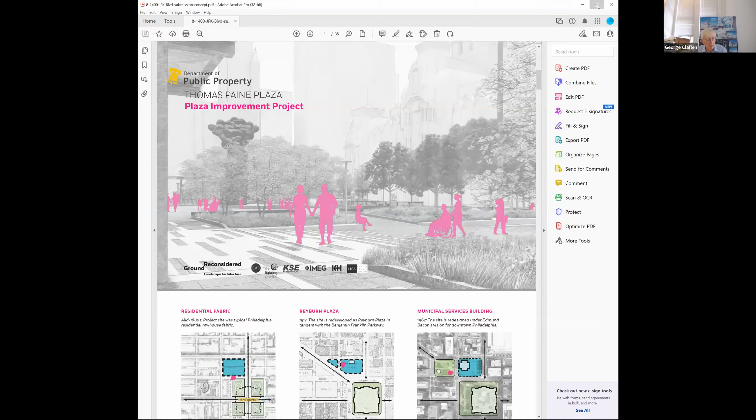I had Inga's article on bus apocalypse and can't bring it up quickly now, I may be able to later. The second item is that without the public knowing much about it, the Greyhound bus terminal is now being handled as a street bus terminal, along with two other bus companies, between 6th and 7th on Market Street, and it's a total disaster. The long haul buses interfere with the city buses, and it's an indication that merits some action by DAG, in the sense that the streets department, without proper guidance from above and without proper planning, has allowed this to happen.

There was an excellent scheme, which the article has a picture of, I think in Inga's article, of a bus station plan for the North Plaza at 30th Street, just north of the station, where there's now a surface parking lot. This is an example of inattention to planning by the city, I think, and we'd certainly be looking for people to help us write a piece on that.

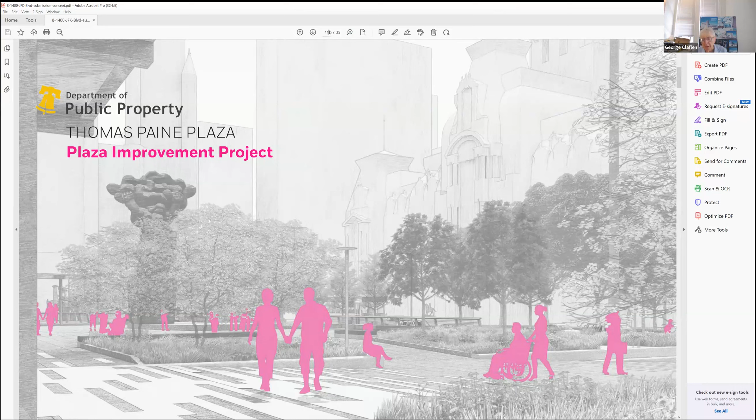But because time is so limited, I'm going to go right into the Paine Plaza. That's the third item. The drawings for Paine Plaza have just been announced because they're now going to the Art Commission. I'm going to go very quickly through them since this isn't the time for an extensive review, but you should be aware of it. There's the plan. That's the MSB building, the white cruciform to the left of that drawing, and JFK Boulevard is at the bottom, Arch Street at the top, and Broad Street at the right.

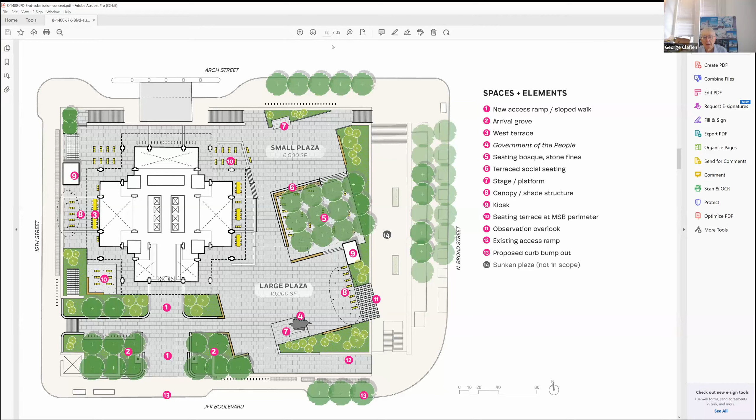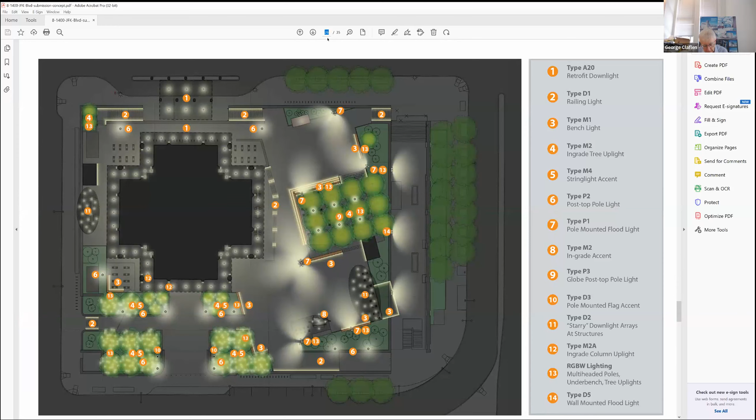As you can see, it introduces a diagonal. The 14 there is a sunken plaza that you're all familiar with, probably along Broad Street. I'm going to go very quickly here, and then there'll be time for maybe just a couple of comments. There's the view of the Lipchitz sculpture and City Hall in the background. There's a very nice night drawing here, and I'm going to put that up. There's a rendition of the lighting concept, and then I'll go to one last drawing and maybe call on David to start some comments.

So let me just say, I think this is the work of Ground Reconsidered. This is their proposal. Among the features that are really very attractive is the astonishing increase in shade coverage. To make that possible, they raise the plaza height about a foot or a little more than a foot through much of it in order to create planting depth.

The bunch of trees on the right side that you see here, the ground is covered with gravel. It's intended as a shady sitting area, a bosque they call it. There are several places where they propose to build shade roofs to shelter areas. There is an enormous quantity of increased seating, places, tables, and chairs for outdoor seating. If you know the situation at the so-called porch at 30th Street Station, same architect, same idea, lots of portable seating. I think in our current emptying out of office spaces, there's a question of how many chairs you need, but otherwise, I think it's a very handsome thing.

The introduction of the diagonal, they say, is justified by the fact that the new group of trees on the diagonal faces City Hall Tower. It's obviously an interesting geometric addition. Frankly, I think the idea that the group of trees wants to watch City Hall Tower is at least smile-worthy, but it is a strong design feature. It does increase variation much more up and down, so it'll be more like a landscape. Given the fact that we just reduced the amount of ground level variation at Love Park and at Dilworth Plaza, that's sort of interesting—we're putting back in something of that now. But all in all, I think it's a very interesting, strong design.

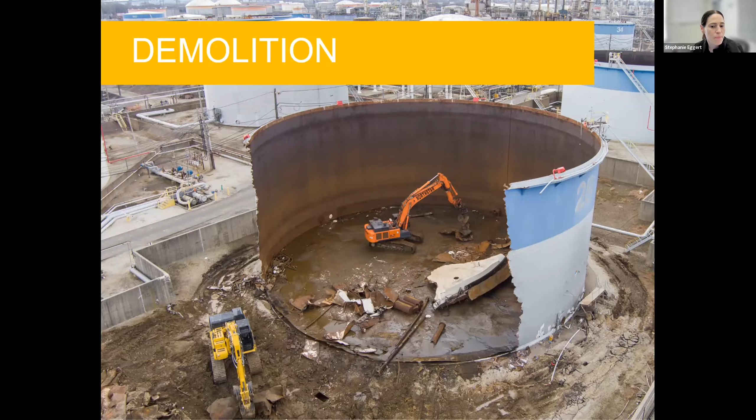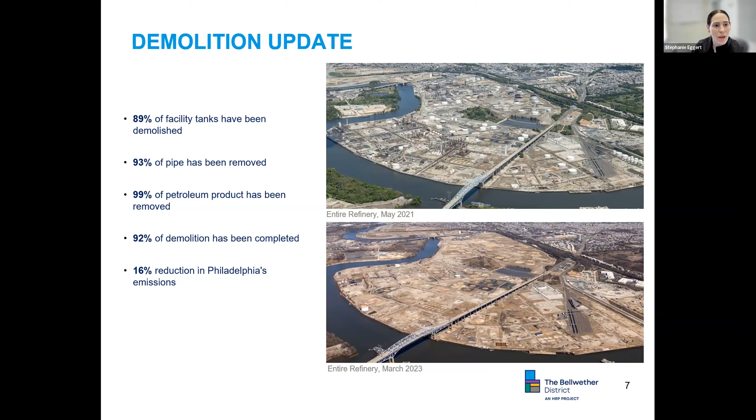We got started on the demolition exercise really around the early 2021 timeframe, and over the course of the last few years have largely completed the demolition on site. We have removed the overwhelming majority of the inherited petroleum product, and we are proud to say that we're nearing completion on this demolition scope and beginning to move into the next phase of our efforts on the development side. With that, I will turn it over to Julianna Connolly to talk through the environmental remediation efforts.

Thanks, Stephanie. I'll just give a quick summary of the environmental remediation work that we've been up to. I think perhaps unsurprisingly, this is quite contaminated property after its over 100-year use as an oil refinery. So there's a lot of work going on, and I know that's not really the focus of this topic, but just to give you guys a sense of what we're up to.

One of the things we spend a lot of time on is cleaning up oil that was spilled to the ground during the refinery's operation. This is very active implementation of remediation systems to pull that oil that's still present in its liquid phase out of the ground to the extent that we can.

Another thing that we spend a lot of time on has to do with sampling the soil in anticipation of earthwork. You'll hear later from my colleagues Amanda and Kurt about the grading that is necessary at this site to get the property to the appropriate elevations for development, primarily related to flood hazard implications near the river. This soil is contaminated because of the site's history, so what we have committed to do prior to our ownership of the site is sample all of that soil before we move it, so that we can make sure it ends up in a location appropriate for its final use.

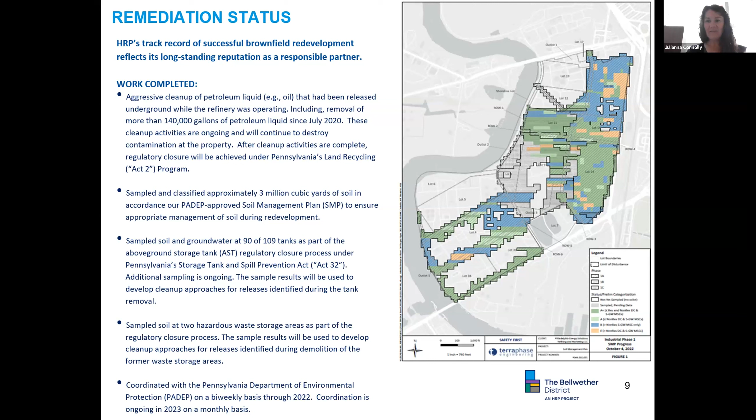And I'm going to hand it off to my colleague, Amanda Macy. Hi, good morning, everyone. Thank you for joining us. My name is Amanda Macy, and I'm part of the mixed-use development team here at HRP.

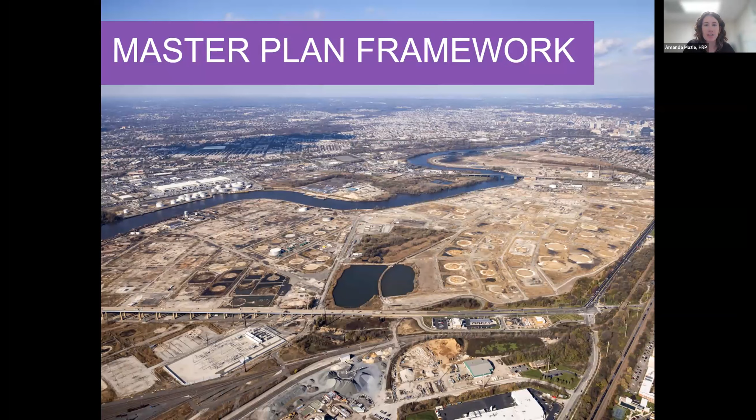We're excited to share with you our in-progress plans for the first phases of redevelopment at the Bellwether District. As you know, HRP purchased the site in 2020 and began the enormous undertaking of decommissioning and deconstructing the oil refinery. As you heard a moment ago, the work is nearing completion, which allows us to increasingly focus on the future transformation of the site.

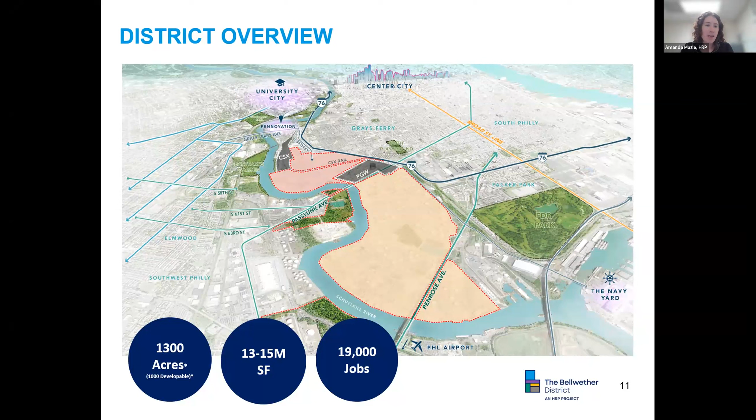As an oil refinery, the site was home to one employer in a single industry, but in the future, the site will be home to dozens of employers in a wide range of industries, from logistics and distribution to light manufacturing to research and development. This will provide more diverse and resilient employment opportunities to Philadelphians across a broad spectrum of professions and contribute significantly to the economic development of the region.

Today, you'll hear more about the two sides of the campus we're planning and the first phase of development on each side. The innovation area to the north of Passyunk Avenue is anticipated to house approximately 3 to 4 million square feet of life science, biomanufacturing, pharmaceutical, and other innovative uses that build upon Philadelphia's world-class academic institutions and position it as a global leader in cell and gene therapy. Over time, it's estimated that this area could be home to 8,500 jobs in these growing industries.

The industrial and logistics area to the south of Passyunk could support over 10 million square feet of modern warehousing, distribution, and light manufacturing facilities, leveraging Philadelphia's prime location on the eastern seaboard and bringing over 10,000 new jobs to the city.

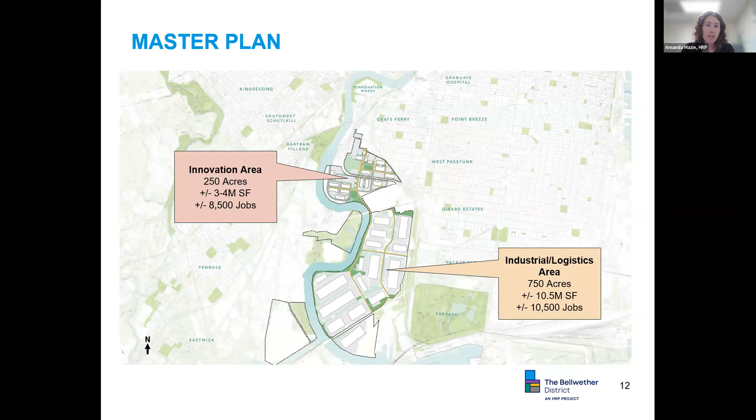As we tackle the significant task of redeveloping this site, we've identified three principles to guide our physical planning. The first principle is to reintegrate the site. Having been an oil refinery for well over a century, the site was fenced off from the surrounding community and functioned as a bit of an island in South Philadelphia. In many ways, the city grew up around the site with few points of connection, either through or to the oil refinery. The challenge now is how to reintegrate it into the city in a thoughtful way while we contend with the Schuylkill River, which forms a natural barrier on one side, and I-76, which forms a man-made barrier on the other.

The second principle is to create green pathways. As we build these new connections, using the city's complete streets and other guidelines to inform our site designs, we have an opportunity to create new welcoming and green sidewalks and cycle paths within the district. And the last principle is to create a sustainable district.

As we design and construct new streets, buildings, and other site elements, we're incorporating a variety of strategies to reduce carbon emissions, increase resilience to climate change, and encourage the use of renewable energy. Even though we're early in the project, these strategies are already being incorporated and will continue to be developed as the project makes progress.

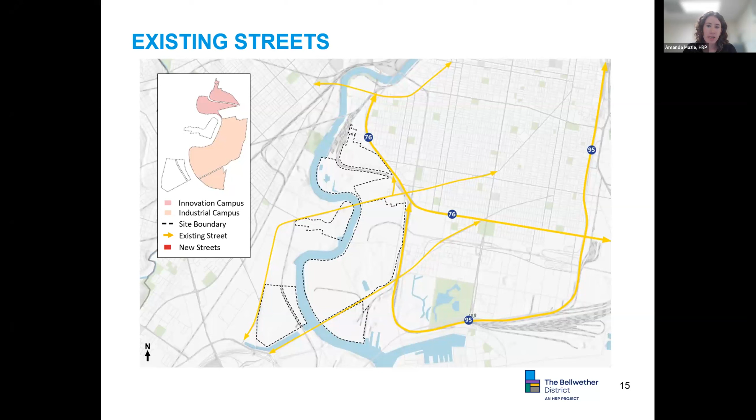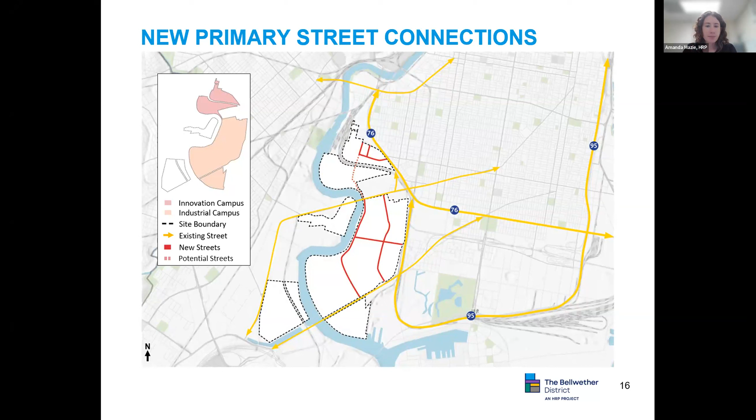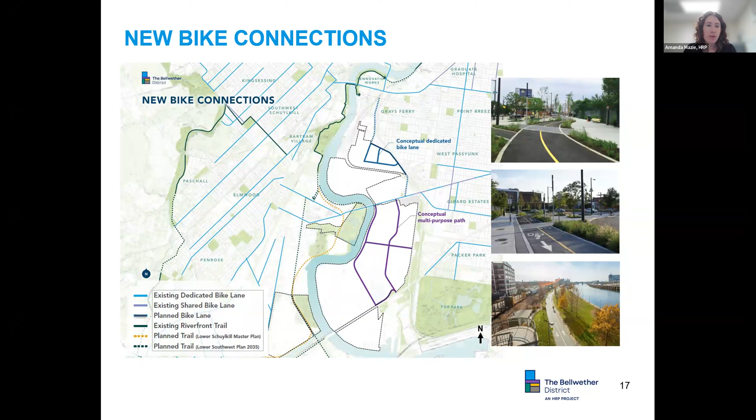We're also planning for bike and pedestrian connections through the site. We will connect into the existing north-south network and plug into Grays Ferry Avenue, 34th Street to the north, and Penrose Avenue to the south.

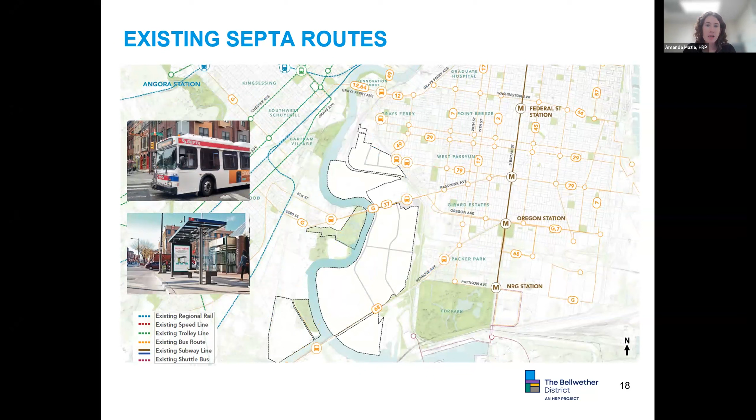Existing SEPTA routes. We are currently coordinating with SEPTA to identify opportunities to extend services and bring new services to the site, which will happen over time in a phased manner.

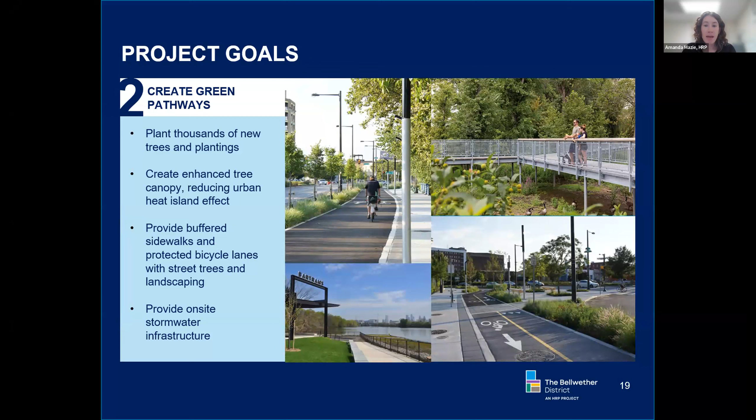Create green pathways. Our second goal looks at how we create green pathways through the site. How can we create a green network that is safe, multimodal, and uses landscaping to create open spaces with enjoyable pedestrian experiences, and uses stormwater management through landscape and green infrastructure.

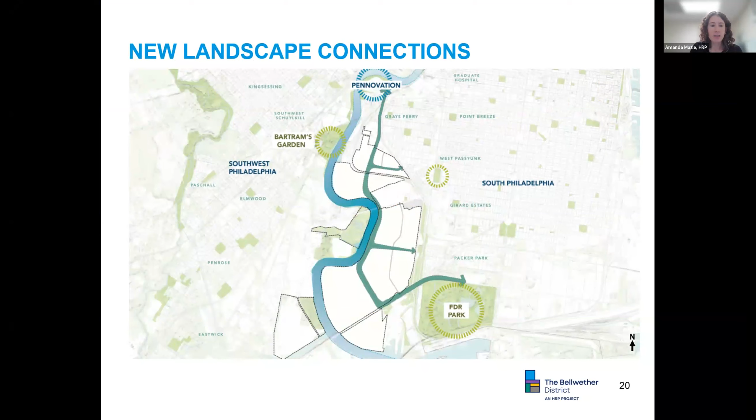Great. Thanks, Amanda. Good morning, everybody. Thank you for joining us. I'm going to wrap up the project goals here and then get into some of the industrial development. I do serve as Vice President on the industrial development team here at the Bellwether District.

To start with these goals, essentially we've highlighted 6 main goals under the Sustainable District major goal. The first, believe it or not, we've actually already completed. Just by closing the refinery and working through the demolition of a lot of the processing units that were here under the former use, we have reduced the emissions in Philadelphia by approximately 16%. The next 5 goals are really aspirational goals as we move through the program.

The very first is bringing the entire site up out of the 100-year floodplain. Within that goal, we're repurposing soils on site and trying to maintain a net balance as we undertake this first earthwork phase and as we go through subsequent earthwork phases.

The second goal is to raise all the building pads out of the 500-year floodplain. As people get more into sea level rise and things of that nature, we really think that 500-year floodplain target for all the buildings is going to be a good sustainable one going forward.

As we look to get into the buildings, we are looking at LEED certifiable new buildings, in both portions of the campus. We're excited to undertake a lot of the underlying issues as it relates to LEED to make sure we're positioning these buildings to be really cutting edge going forward.

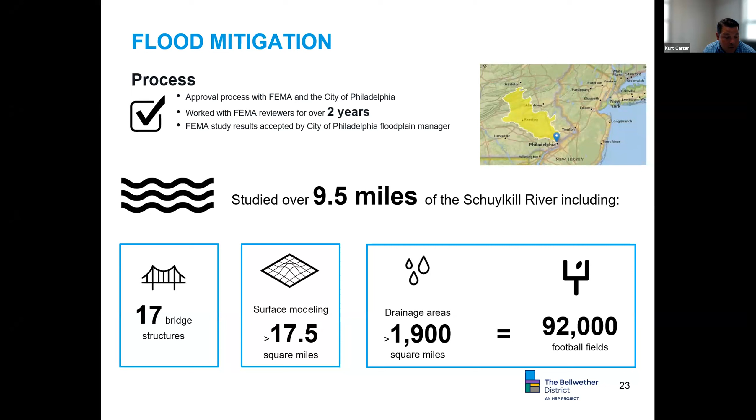By adding all the new drainage infrastructure, including the piping network, swales, and retention basins, we think a lot of the stormwater is going to be much better managed under the new program than what existed here before.

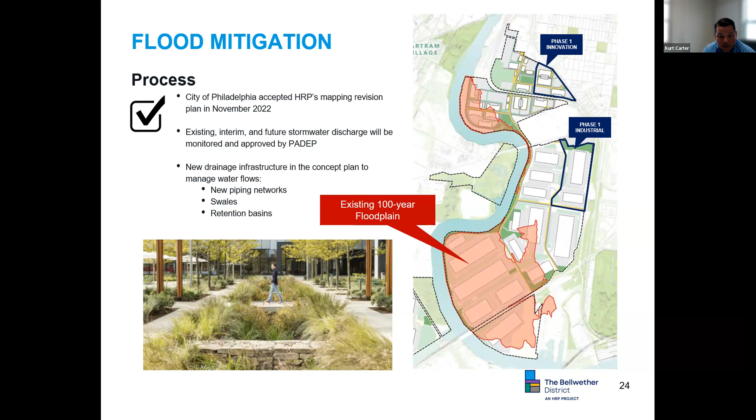This gives you a good representation of the industrial portion of the site's current concept plan. What you see in the blue dotted line is where we intend to start. This first phase is comprised of 2 buildings. The southern building, called Lot 15, is about a 326,000 square foot dual or multi-dock building with additional truck parking and employee parking. Further north is Lot 16, which will be anywhere between 702,000 and 727,000 square feet. We're evaluating optionality so that if that building goes to a dual tenant setup, there may be some slight changes to this layout.

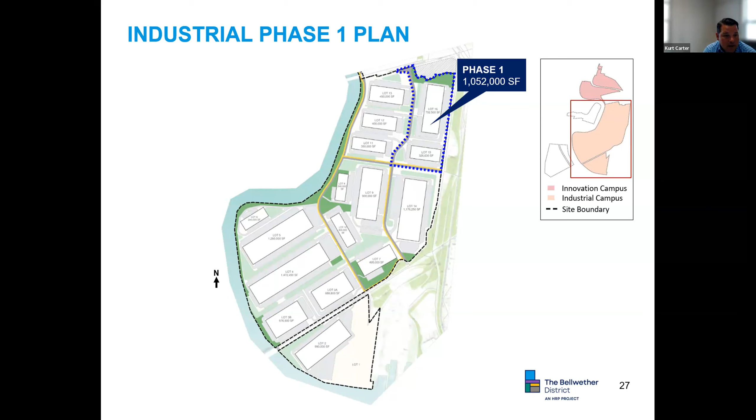So we are showing a little over 725,000 square feet. This building would have just over 180 additional trailer parking spaces, and then just under 500 employee parking spaces for the folks that would be working in the building.

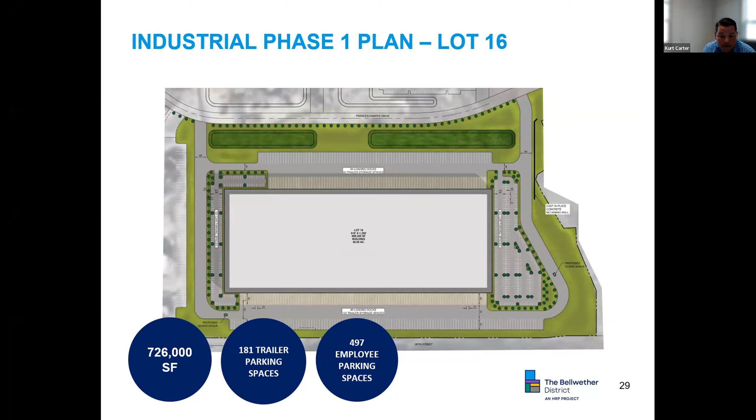So phase 1 of the innovation campus follows industrial by approximately 6 months. We're planning to begin earthwork at the end of this year, with vertical construction starting approximately 6 to 9 months later in Q3 2024. Vertical construction will last approximately 12 months and will conclude in Q3 2025 for our phase 1.

Next slide. So to recap, phase 1 of the innovation campus is located north of Passyunk, directly between the Schuylkill River and I-76. It connects to Pennovation and University of Pennsylvania's campus directly north via 34th Street. We chose this as our first phase because it's closest to the existing infrastructure and the surrounding neighborhoods. It's approximately 40 acres, and our first phase is approximately 500,000 square feet and 3 buildings. These first 3 buildings are designed to accommodate biomanufacturing, processing, and production facilities, along with tech-oriented uses.

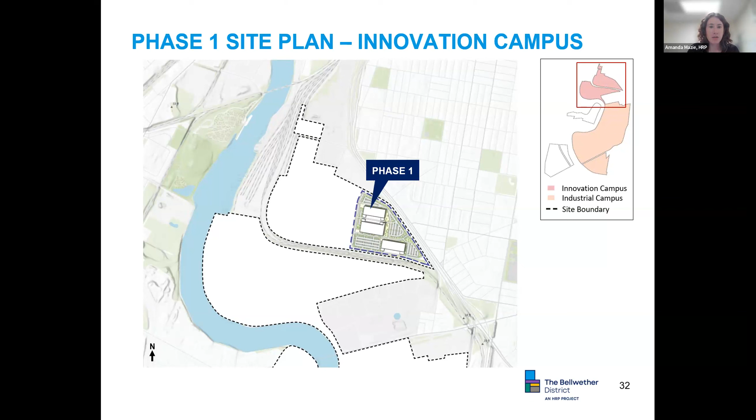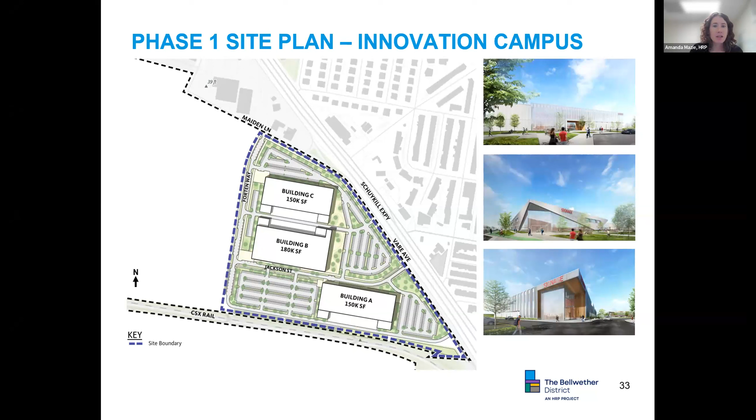They will have large open floor plans with 40-foot clear interior ceiling heights. We're very focused on an urban campus feel with attention to lots of landscaping, central courtyards, dedicated bike lanes, protected sidewalks, and on-street parking. The buildings will have a highly designed exterior with a mix of glass and metal panel. Additionally, building B in the center will contain campus amenity space with a fitness center, conference rooms, and a cafe. And then I think, Mia, it's back to you.

Okay, hi. Christina, you can go to the next slide. I'm going to provide a quick snapshot of some of our workforce development and community initiatives. On the workforce side, we've invested in a number of workforce programs and partnerships that will help train and prepare local Philadelphians for jobs that we create both now and in the future. I'll just name a few of our partnerships.

We have a partnership with the Philadelphia Hispanic Chamber of Commerce's Build Latino program. Through that program, we're helping small Hispanic and Latino-owned construction companies scale their businesses over time. We're also a lead sponsor of Everybody Builds, which is a collaboration between multiple large developers in the city who are collectively committed to growing a more diverse pipeline of workers in the construction industry.

Because the jobs that we'll create in the near term are construction-focused jobs, we're invested in several pre-apprenticeship programs through which we're preparing students for careers in the building trades. For example, we have a really great partnership with the Carpenter's Apprentice Ready program, or CARP. We serve as their toolbox partner, which means that we're providing CARP participants with a toolbox upon graduating.

We have 2 partnerships focused on providing employment opportunities to returning citizens, one with the Center for Employment Opportunities and one with Mural Arts' Restorative Justice program.